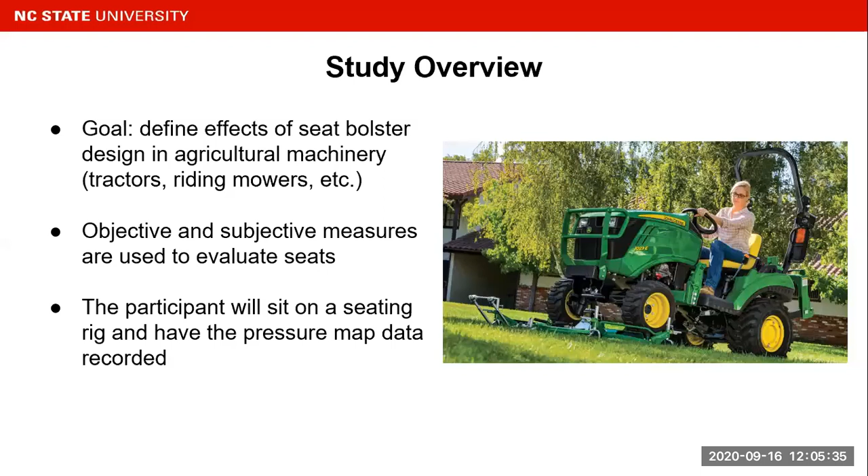So I figured I'd start out giving a brief overview of what exactly a seat bolster is. On the left here, I took a picture of one of my seats, the high back seat, and in that red rectangle are the cushions that come up on the seat pan.

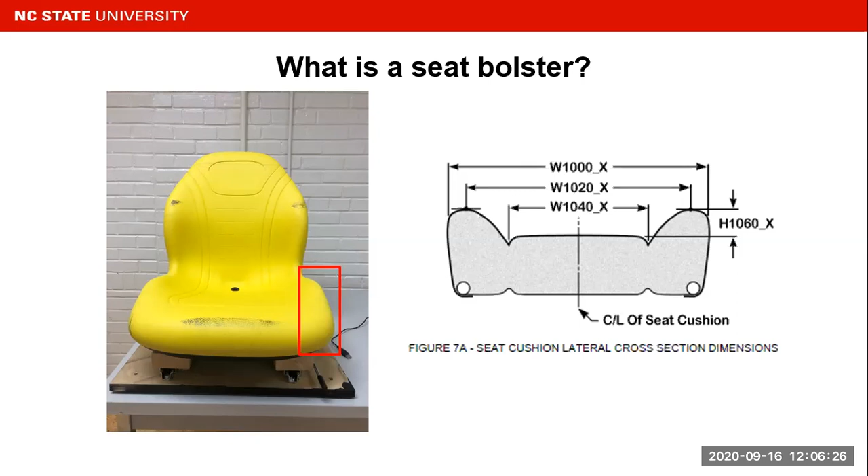Their primary benefit would be considered to provide you some security, especially in a tilted or unstable situation. Off to the right, I reference the SAE standard, I believe 2732, fairly frequently. This gives a definitive answer as to what exactly a bolster is and where it would start and stop. The top of the bolster would be W1020, and the start of it would be W1040, according to that standard.

For my justification, the primary one, and where this idea originated, is through my work with John Deere. I was doing an unrelated pressure mapping study with some seats they were looking at on small machinery. One of the design engineers I was working with mentioned there wasn't really a lot of good, solid research that defined what is a good seat bolster, when's too big, when's too aggressive, what kind of machinery you really want a bigger or smaller bolster on. I took that idea and ran with it for this.

There's supporting evidence for that. There's really a general lack of research focused on this, as I'll get into in some following slides. It's just generally not something that's been touched on a whole lot.

Finally, what I want to do as well is define some of the static factors of seat design. In this figure on the right, from Gkikas's model of seating discomfort from a book he wrote in 2016, there's a fair amount of research on the dynamic factors of seat design, to do with vibration and long-term use, but there isn't really that much that deals with static factors, particularly aspects like seat shaping. So that's what I wanted to touch on and tap into a little bit.

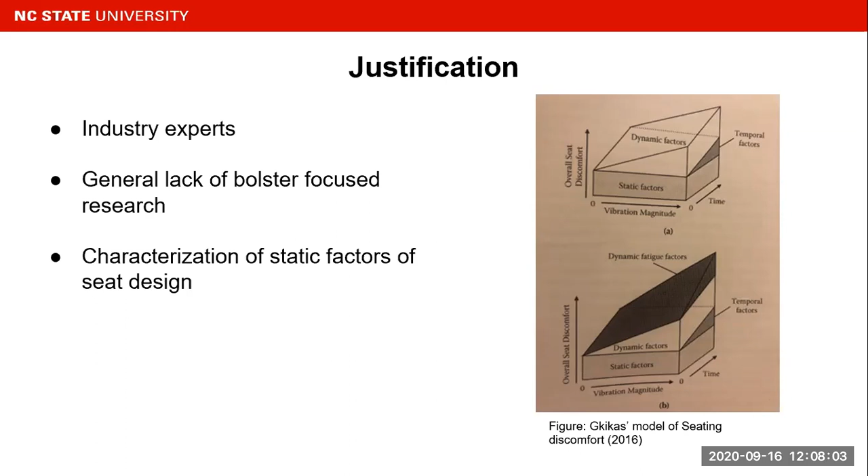In terms of potential benefits, the primary one obviously would be an overall decrease in seating discomfort in users. An important note here is you'd be most likely to see this decrease not so much in personal private users, people who just own a lawnmower and mow their lawn for an hour once a week in the summer. I think where you're really going to see it is people in farming or landscaping where they spend 6-7 hours, long periods of time, on these machines.

That gets into some other stuff which I'll get into a little later. But the people who are going to be on the tractor for a long time and in contact with those bolsters, that's really where I think you're going to see some benefits out of a research study like this.

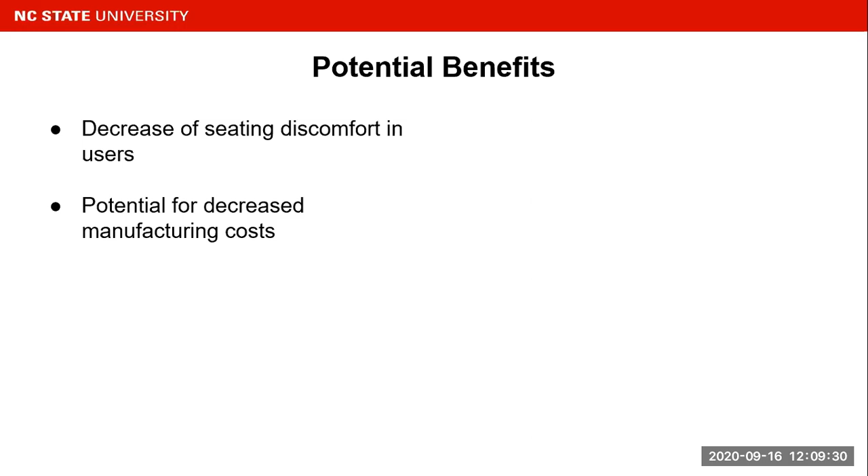Another potential benefit is some decrease in manufacturing costs. If I find that smaller bolsters perform as well as a larger bolster, then you might be able to cut a little cost, strictly material, just from adopting lower profile bolsters, which in a singular unit might be a fairly low cost saving, but over tens of thousands of units might provide some real benefit.

So getting into the literature, I'll start with some of the agricultural research relevant to this. As I mentioned in that first bullet point, what I was looking for was agricultural research that hits on the cross section of anthropometry, seat design, and discomfort.

With those three criteria, you get two general research segments. The first is research that looks at specific populations' lack of fit, and I have a few papers referenced there. What this refers to are, I believe, three studies: Iranian, Indian, and Brazilian, respectively - basically different population groups where the designs, maybe based on a North American model, don't match their population metrics like height and weight.

That's not terribly relevant to this study. Where you get into something more relevant is the research using pressure mapping to define discomfort in seating. There isn't a ton of that out there, and the difference from what I'm doing now is those seem to be a little more high level.

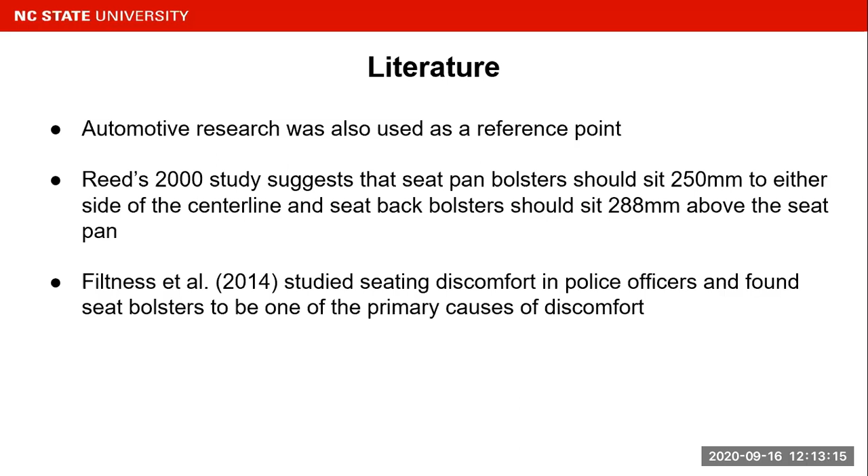One thing to note on the automobile research side of things is it's not really a perfect parallel for agricultural machinery. This comes down to three things that are majorly different between those two types of machines - the first one would be seating posture.

This gets into my second point of vision direction, where in a tractor you're really going to need to be looking around your machine, especially if you have an implement attached. Even just with a mower on a tractor, it can be front mounted, mounted directly underneath the cab, rear mounted, or boom mounted so it's way off to the side. So you have a lot more variability in having to shift around in your seat, find where your corners are, and see what you're doing than you would in a car.

And of course, controls are significantly different between those two types of machines. Cars are pretty limited to just steering wheel and pedals, whereas in a tractor you've got innumerable other controls - you've got PTO switches, maybe joysticks if you've got a front loader mounted. I think that could definitely have an impact on how much you're running into those bolsters, how much you're impacting them, how hard you're impacting them, especially if you get into additional pedals that might not really exist in a car.

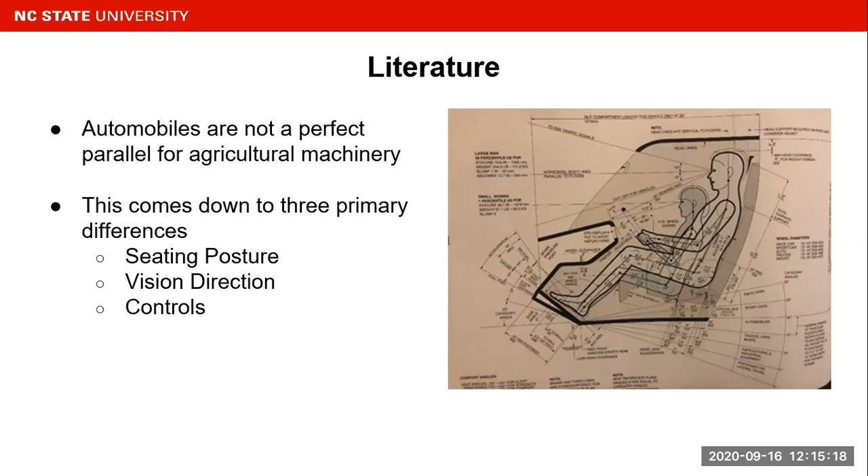The final part of this introductory section is my research questions. Question 1: how much will the seat bolster size and position affect the pressure distribution? The second one: how do bolster height and size change response variables in people with different anthropometry - anthropometry primarily being weight, but also gender.

How do non-forward facing and flat driving situations affect subjective user discomfort and pressure distributions? And how effectively can pressure rating be used to predict subjective discomfort in users?

In my method section, I'll hit mainly 3 topics: participants, kind of what I think might be important for this study, and some of my inclusion criteria; the apparatus, so not only the seating rig, but also the technology and how I set that up; and then the experimental design, the different factors, replications, and all that.

In terms of participants, I think sex and weight are going to be the 2 most important factors. Sex really just comes down to bone structure and maybe some fat distribution. Male hips tend to be a little higher and thinner, whereas female hips tend to flare out a bit more. Especially in lawnmowers, there's a pretty even split between male and female users, from some of the stuff I worked on at John Deere. So I think it's really important to effectively characterize both populations.

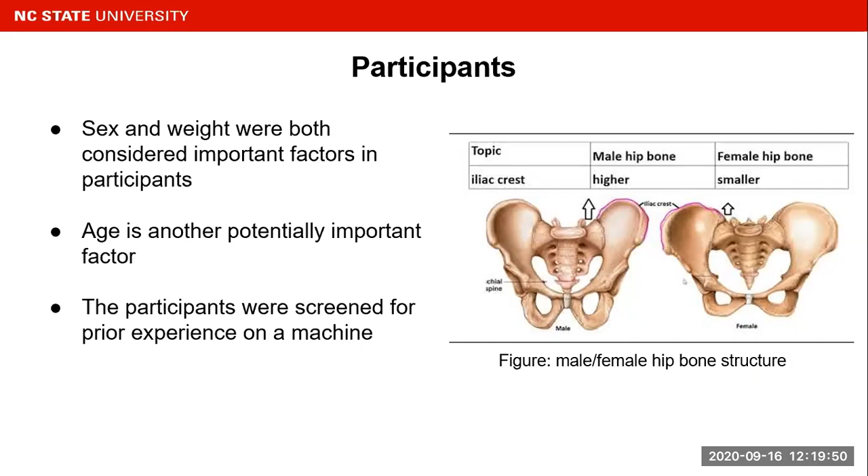In terms of apparatus, first I want to go through some of the technology I used. The simulation was Farming Simulator 19, I believe, running on a PlayStation 4. It's quite simple to use and set up - you can customize it to whatever you want, especially with a PC version. It allows a really seamless connection with different control methods.

For this study, to increase realism and more closely mimic the postural stuff I think you'd see, I went ahead and bought a steering wheel and pedal set. It's important for this type of research that you get the angles right, so I don't have the steering wheel flat mounted - it's up on an angle. I think the steering wheel and simulation combined recreate the experience of driving a tractor and doing some sort of task as faithfully as you can probably get away with in a lab setting.

Finally, the pressure map I used - I believe it was a BodiTrak pressure map, high resolution. It's really just a seat pan one, so it's fairly small, and I believe it goes up to 200 millimeters mercury pressure, if I'm not mistaken.

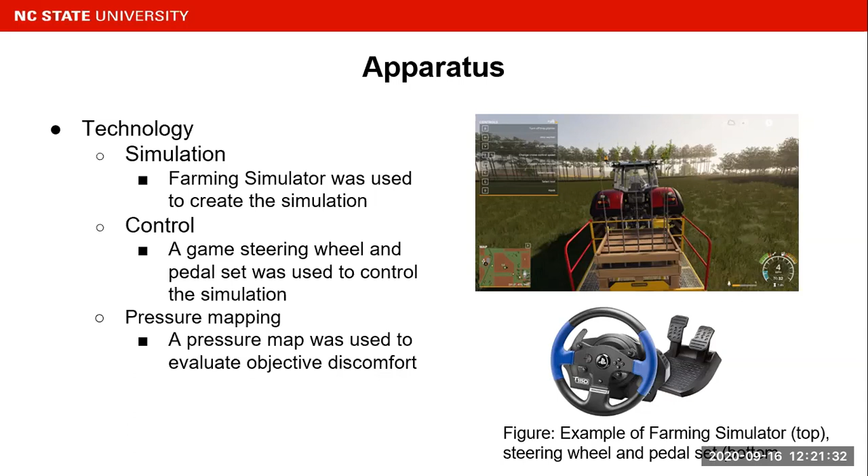One of the more important things here was creating a relatively faithful recreation of the seating rig. The seating rig I created was based on a John Deere 100 series lawnmower. Something else that's really important in creating a seating rig is making sure your measurements are right. In machinery and operator station design, even 5 millimeters is a really important amount of distance you have to cover, so getting your rig as precise as possible is quite important.

Basically, where I took all my relevant measures from was the center of the slide rails. Ideally, if you're working with a company - this research was not sponsored by John Deere, it's just through our lab - you could get your hands on seat geometry, machine geometry, and really what you'd want to do is measure everything off the seat index point. That's the most reliable point of measurement in reference to the seat. But without that, I just went ahead and used the center of the slide rails.

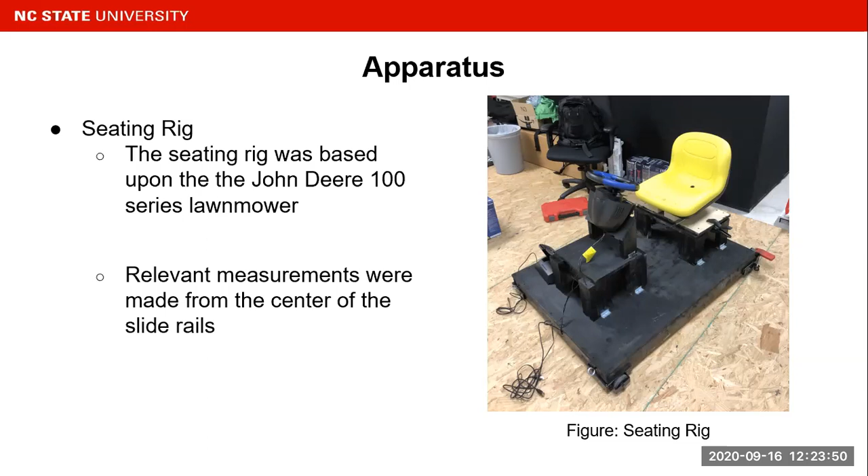Okay, so my experimental design is a within subject design. I have 8 experimental conditions, which are the seats, the angle, and the forward and backward facing. I have 2 replicates of each experimental condition for a total of 16 trials.

Which come down to 5-minute trials with some short breaks in between them. You can kind of see the setup I have here. For the angled condition, I have the rig put up on 4 jacks. And then I have a forward and backward screen that I have an HDMI switch hooked up to, so I can toggle between those 2 easily between the different trials.

So for independent variables, I have 3 2-level variables, which I just mentioned. The first one is the seat. I have on the left a low back seat, on the right a high back seat. I think these 2 represent 2 fairly different ideas on how you should go about seat bolster design.

So the low back seat, the bolsters, as you can see, are a lot less prominent vertically. They're shorter, not quite so contoured, but in general they're somewhat thicker, and they're actually a little bit closer to the center of the seat. Whereas the high back, you can see they're a lot higher, more contoured, and sit a little bit wider on this seat.

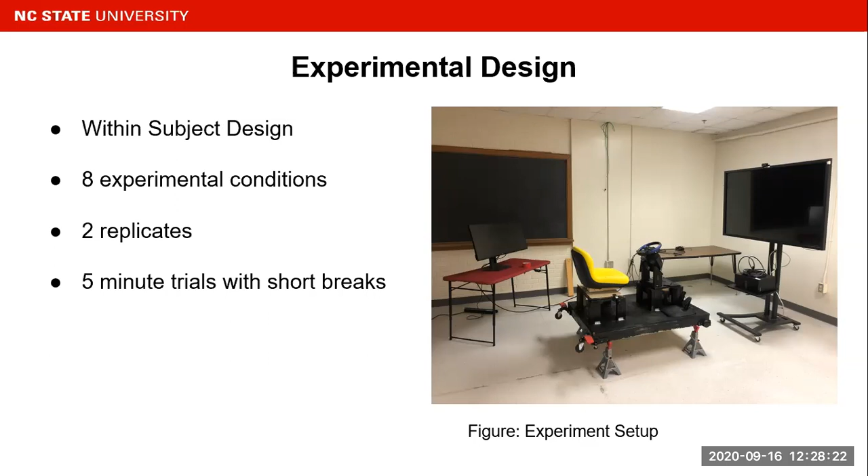And finally, I have driver orientation. As we saw in that previous slide, I have the front mounted screen for forward facing and that rear one, which is over the left shoulder of the user. Really what that's trying to capture is, as I mentioned earlier, you can have implements in a lot of different places, and they vary pretty wildly in how long they are, where you want to be looking, how far in front of or behind the machine they are.

So I think while it's not perfect, what it kind of boils down to is the user will spend 5 minutes, one of those 5-minute trials, facing behind them. And that's not terribly realistic. Really the behavior you would see would be someone driving forwards but frequently checking over their shoulder, but that's difficult to recreate in a lab.

But having that captured, I think, will also be important, just because that causes a lot of shifting in the seat. You kind of have an awkward posture, trying to keep feet on the pedals, but also not torque your back and neck all the way around to stay comfortable. So I think this is also something that might bear out some pretty interesting results on how much they're getting into the bolsters and how hard they're getting into the bolsters.

All right, so for dependent variables, the first one, as I mentioned, was pressure mapping. So I do want to talk about this a little bit here. Something that I really wanted to do was differentiate where the bolsters start and stop, and be able to collect the data just on those bolsters.

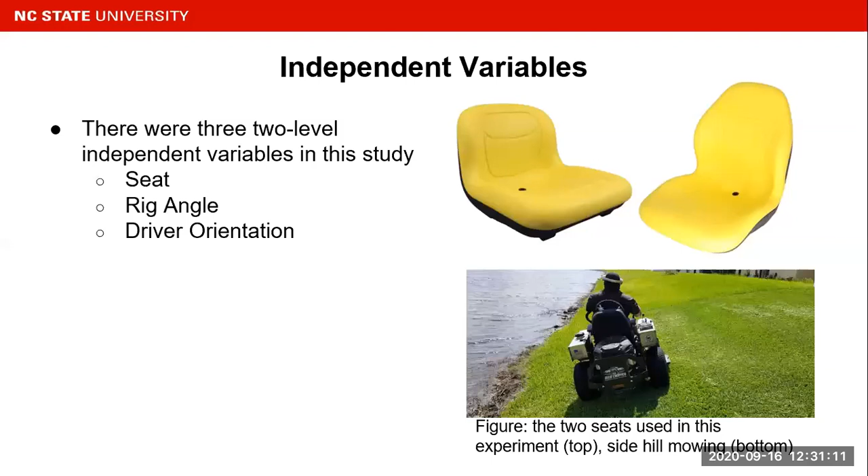So basically what I do is before each trial, I go through and find that drain hole and use that as a central location before the trial starts, so I'm later able to extract the data.

For the subjective measurement, I have the Automotive Seating Discomfort Questionnaire. The reason I went with that one is, of the various automotive and agricultural seating discomfort surveys out there, this ASDQ was really the only one that specifically looked at the bolsters and specifically asked questions about the bolsters.

I think it's kind of an interesting questionnaire as well, just because, as opposed to the second one I'm going to talk about and several other surveys, it actually uses continuous scales to extract this information.

My second one is the Nordic Body Discomfort Survey, which I feel is a pretty well-known one out there. This is the image I used for my copy of it. Basically, I have the body sectioned off into multiple sections, and I think it allows a good opportunity for the user to identify exactly where, if anywhere, they're getting some discomfort.

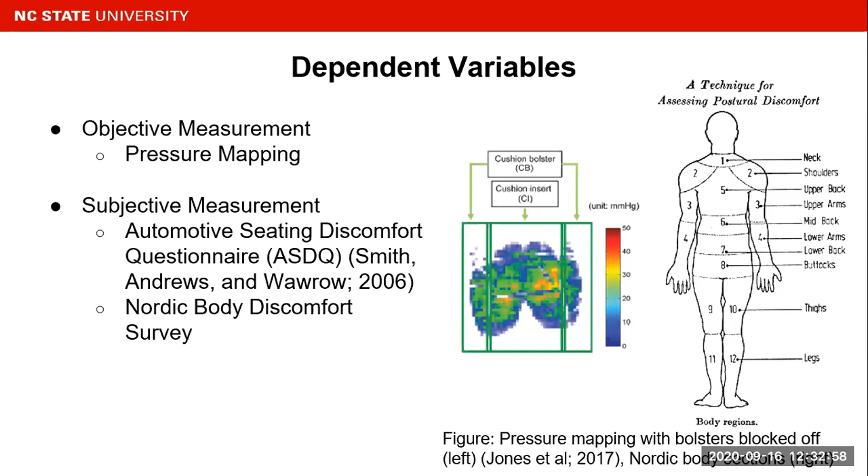So my final slide deals with some future work and some potential weaknesses of the study. I think one potential area for continued work would be on other aspects of seat design.

As I mentioned earlier, there's a fair amount of research when it comes to some of the more active factors, things like vibration particularly. But there isn't really a lot, not only in seat pan bolsters in this case, but seat back bolsters, things like seat stiffness, how stiff the foam or material is. That's kind of an untapped resource, which I think could definitely have opportunity for future work.

Another one that's kind of interesting, mentioned to me through my work with John Deere, working with some experts in ergonomics, is the interaction between foam seats and clothing. Over the past maybe decade, synthetic bottoms, like basketball shorts and yoga pants, have gotten a lot more popular. How those interact on strictly a friction basis with the seats, how much they're catching, and how much more you're sliding around compared to jeans or cargo shorts, khaki shorts.